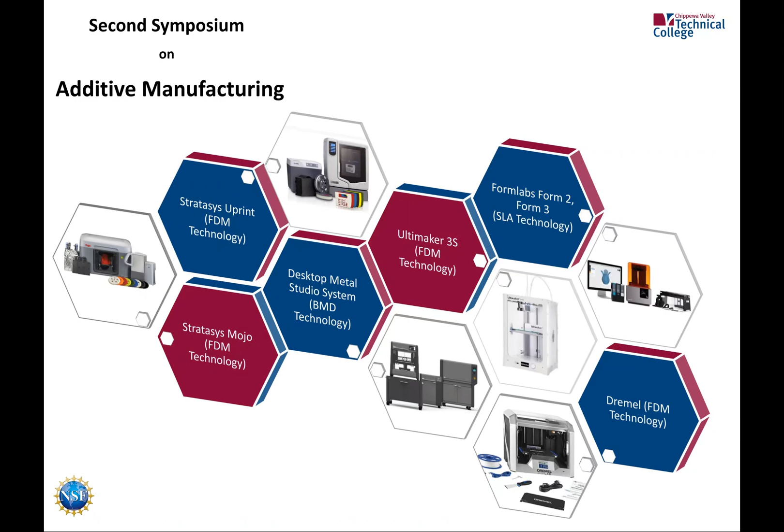Based on your response to our question, we chose Zoom as a digital platform to host this event. We are in the middle of the digital transformation era, and coronavirus somehow accelerated this digital transformation process. Our world has undergone a radical digital transformation, and in this symposium, we believe there are ways to make it smooth and fun.

We would like to use more graphic design and cloud computing techniques to provide you a more enjoyable digital experience. Our aim is to create more interactive and intuitive content. Activities like Kahoot with graphical context, a digital scavenger hunt in our website, and a virtual tour of Zeiss Metrology Laboratory are our first steps in this direction. I'm sure your creativity and reflecting those creative ideas in our surveys will help us to leverage innovative technologies and creative solutions across our online activities.

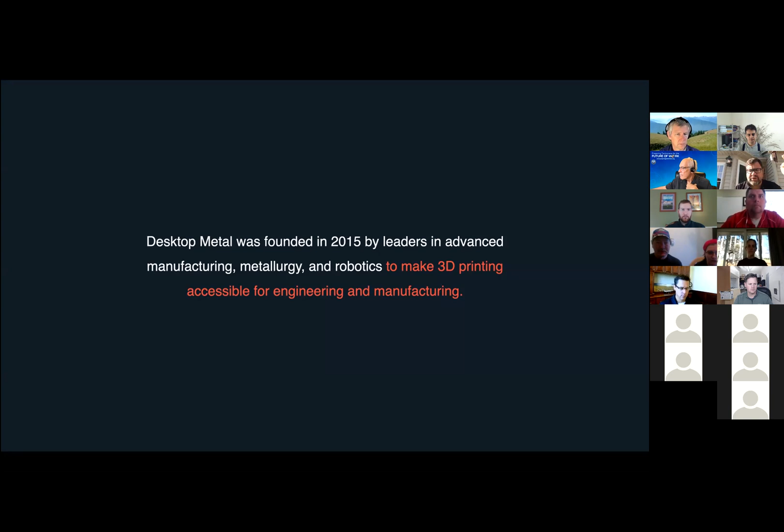And we believe we've actually done that with the advent of the Studio System, which we're going to spend a great deal of time talking about because that's our entry level metal system. Going into the first quarter of next year, we will be making a big splash with our new composite printer called the Fiber. And then on the manufacturing side, we have the Shop System as well as the Production System that are really geared to those folks, whether they're in automotive or large manufacturing where they're doing hundreds of thousands of parts a week. So these are for maintaining inventories in-house, having customer-ready parts, things of that nature. So like I said, we're going to spend some time going through the Studio.

So what are some of the challenges that we see in education for manufacturing? Low volume. Almost all parts produced are in low volume, resulting in higher than normal costs and longer lead times. And we see that from both an additive or a subtractive side, where the subtractive folks are not as interested in doing what we call the small batch or onesie twosies, and that's where we really fit the bill, so to speak. Complex geometries. So when you get into applications where you're using 5-axis mills, sometimes it's really hard to finalize or finish a part that may have cooling channels that a mill can't do. That's where we come in.

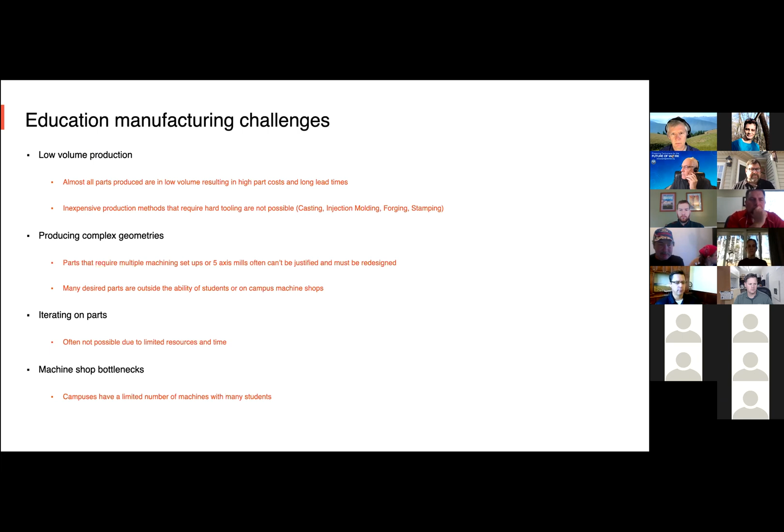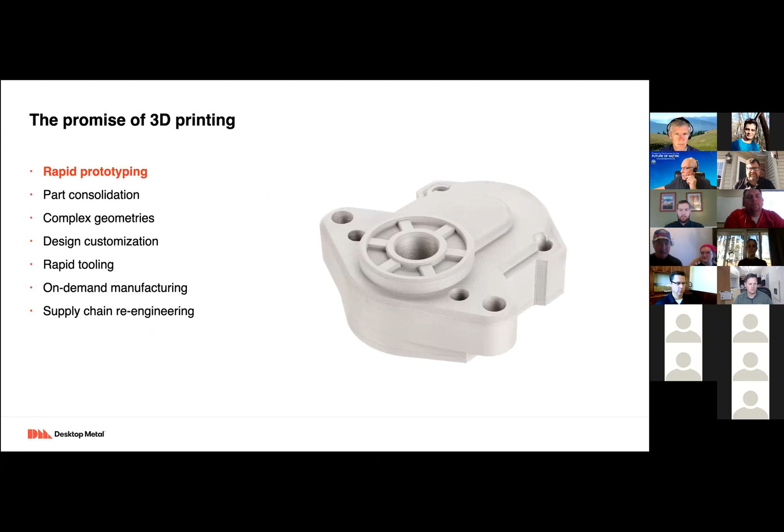Iterating parts, lead times, and machine shop bottlenecks. So these are areas where we see 3D printing really allowing us to help the end users with low volume production, producing complex geometries, and again, eliminating the bottlenecks of a system. When we also look at 3D printing, we look at it from 7 different areas: rapid prototyping, part consolidation, complex geometries, design customization, rapid tooling, on-demand manufacturing, and supply chain re-engineering.

But why should a university or a college or a high school teach additive manufacturing today? And it doesn't necessarily mean just specifically in metal, but even in plastic. Well, first and foremost, 3D printing is here to stay. It is a key technology of design and manufacturing. Some of the larger companies have embraced the additive world, which is beginning to trickle down into the smaller companies. It gives the students an opportunity to learn both from a CAD or SolidWorks and fabrication side, and allows the students to produce parts that really push the limits of manufacturing methods.

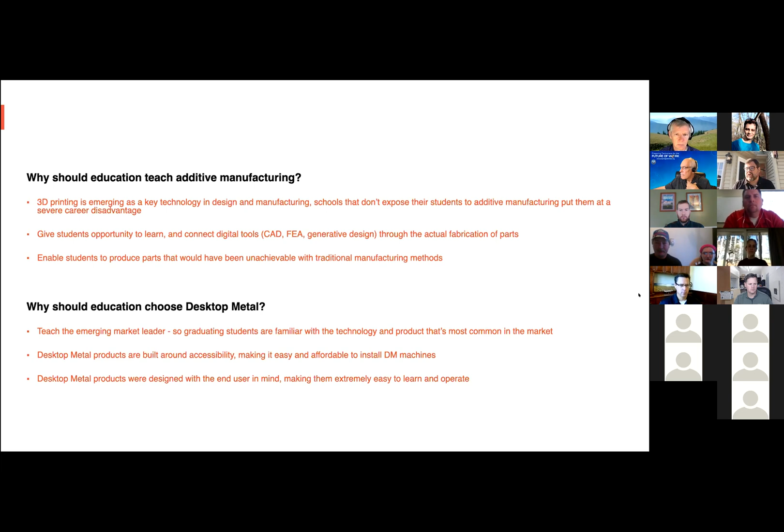You know, why should they look at Desktop Metal? Well, first and foremost, we believe that our system allows schools to invest in this type of technology. Secondly, we will be moving towards a curriculum and/or a certification, which would then allow the students to show future employers that they are able to do the job in both the plastic or the metal side. And it allows them to design and be creative in their current job functions.

Within the 5 years, we have now shipped well over, I want to say it's probably about 300 to 350 systems worldwide. Most of them are in the United States. We have a large presence in Europe, and we're beginning to find more of a presence in South America. But if you look at some of the folks that we deal with on the education side, there are some of the big name schools like Duke University, Texas A&M, some of the large engineering schools, and then we trickle down even to some of the high schools. Currently, we have, I want to say 2, maybe 3 high schools that have adopted this type of technology, which has really been an eye-opener for us, because it really shows that there is an interest even at that level in learning this type of technology.

On the commercial side, it is much broader. You get into folks that are in automotive. You get into folks that are in strictly manufacturing. You get into some of the scenarios where they're actually doing jewelry or what we call defense, like Lockheed Martin and people like that. So there are a lot of folks that are using this type of technology to better their overall environments.

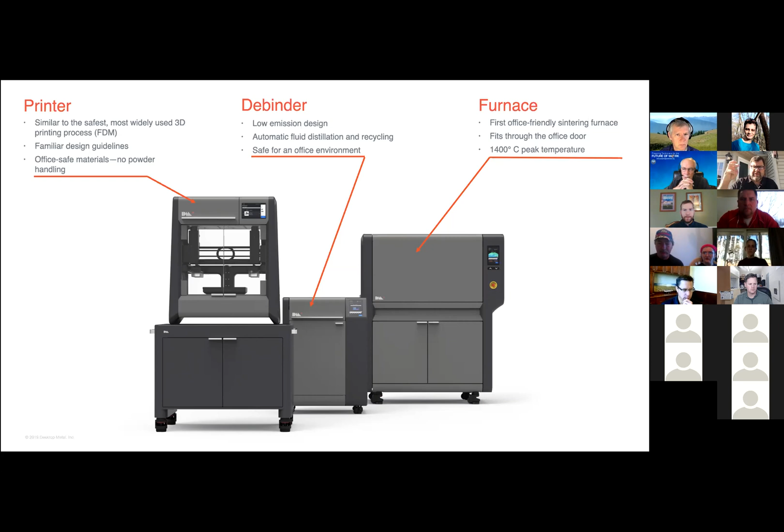But the build volume itself is a generous 12-inch on the X, 8-inch on the Y, 8-inch on the Z. So you're able to build very small parts to very complex parts to very large parts, which sometimes maybe the CNC or the subtractive just really can't do.

After this, this material acts the same as subtractive, so it can be tumbled, it can be media blasted, it can be welded. If you want to bring the Rockwell up, it could certainly be HIPed, or it can be thrown into an annealing oven to help bring the Rockwell up to make it structurally more sound. So again, instead of taking material away, we're adding, so it does act as the same material as well.

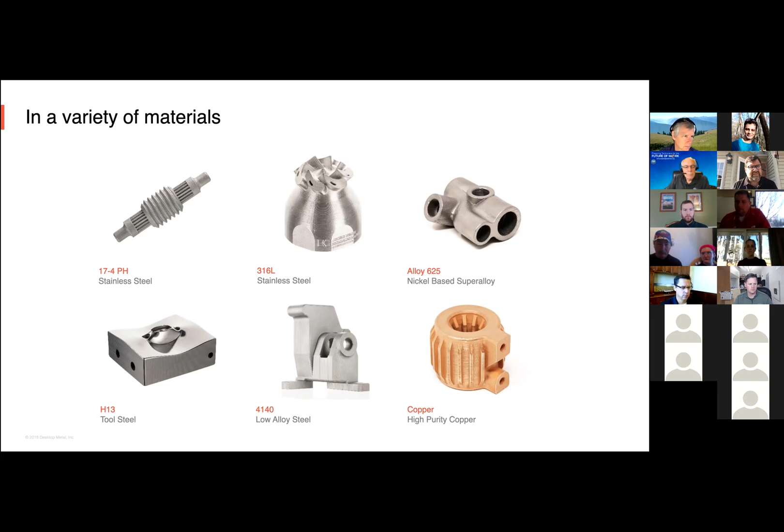Today, the materials that we offer for the Studio System are 17-4 and 316L stainless, H13 tool steel, and 4140 alloy. Copper is being introduced at the end of this month and being shipped out, and then Inconel 625 will be early sometime in 2021, whenever we can get through this pandemic and we can do some more testing. Beyond that, we have a long laundry list of other items, cobalt chromes, other stainless, other alloys that we will introduce as well that can be used within this system itself.

Some of the key features, when people ask us about why bring metal in, is because they've heard the stories of the lasers where you're dealing with hazardous powders, or you're dealing with the requirements of special facilities upgrades. With our system, there are no hazardous powders. If you see the canisters to the left-hand side here, all of those are the rods of material that the person does not come into contact with. But you can hold the rod in your hand because, again, it is bound metal encased in glorified wax.

There's no need for respirators because the debind system uses a non-caustic California Prop 65 compliant solution, in which the operator does not put their hands into the solution. It fills up after you hit start. There is no third-party equipment required. Everything is manufactured by Desktop Metal in Boston. And again, there are no real requirements needed for special facilities upgrades. So we've tried to make it as office friendly as we possibly can.

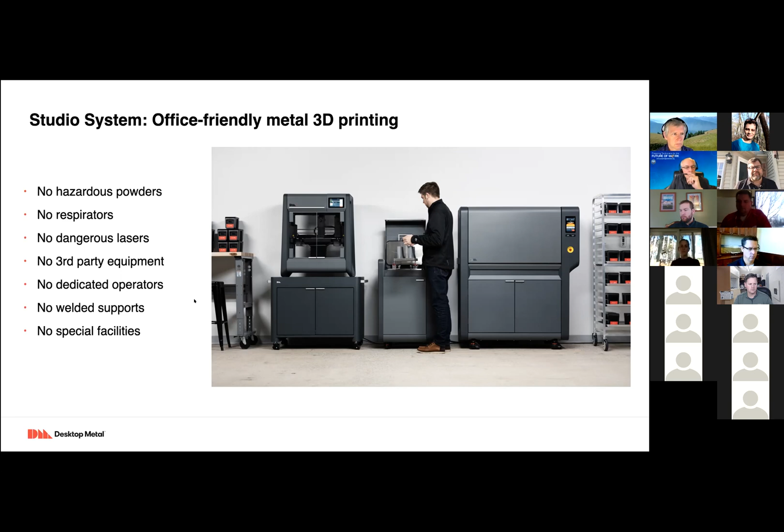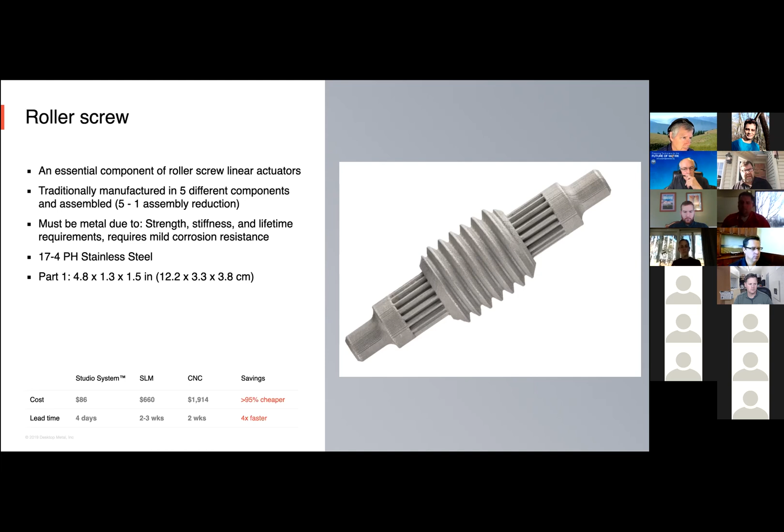When we look at some of the applications, this is where the rubber hits the road, where we're able to really show a differential in price and a differential in lead time in getting something done. This example of a roller screw is about 4.8 inches in length. So you can see that doing it with a laser system, such as SLM, is about $660 to produce that one part. If they do it via subtractive with a CNC, it's almost $2,000. But if you look at the material cost and the time to do it on our system, it's about $86.

So again, when you start looking at this, no, we're not going to be the answer for every application, but there are applications such as a roller screw where our system fits the bill. And you can see there, that's the application and where it goes into.

And it just shows some of the different designs that we're able to make iterations on. And we can also do the screws. And if you wanted to tweak them as well, you could certainly do that.

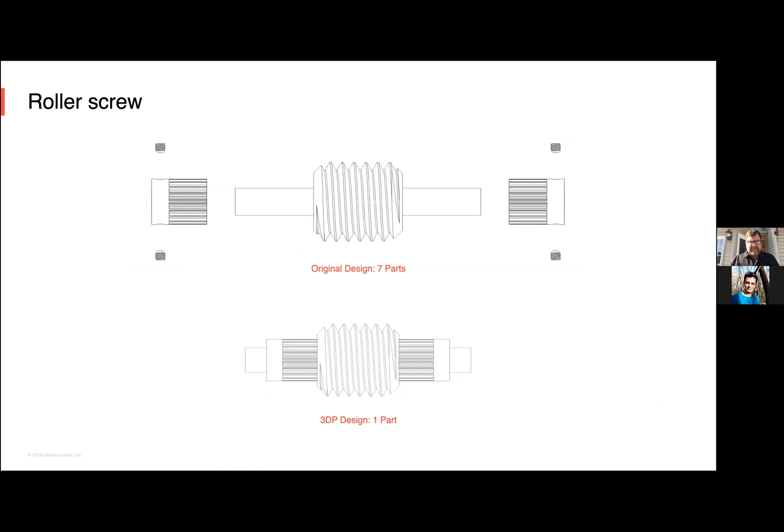The motor mount. The motor mount is a part that we use for a NEMA motor today. Again, this has been printed in stainless steel 17-4. And again, if you look at the overall costing, we're about 90% less expensive. I hate to use the word cheaper, but less expensive than CNC. And again, the time frame in which it takes to process the part versus the processing of the CNC world is certainly less, and able to get it out into the marketplace faster.

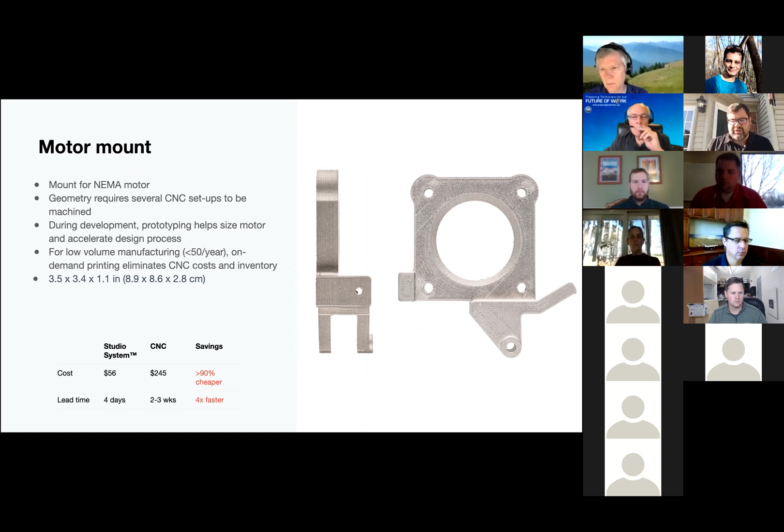And again, here's the bracket that goes on the NEMA motor itself. So people like Baldor or other motor manufacturers can utilize this type of technology, or folks that are using these type of motors that don't want to go back to the OEM but want to print them internally, they can do this as well.

One that's really kind of exciting for those students that have watched BattleBots, we actually produced this fighting robot saw arm for a BattleBot in 17-4. This was really kind of an interesting application that the team came to us with. We were able to print it, able to make it pretty by doing some post-processing to it, whether it was polishing or whether it was through doing a ceramic tumbling.

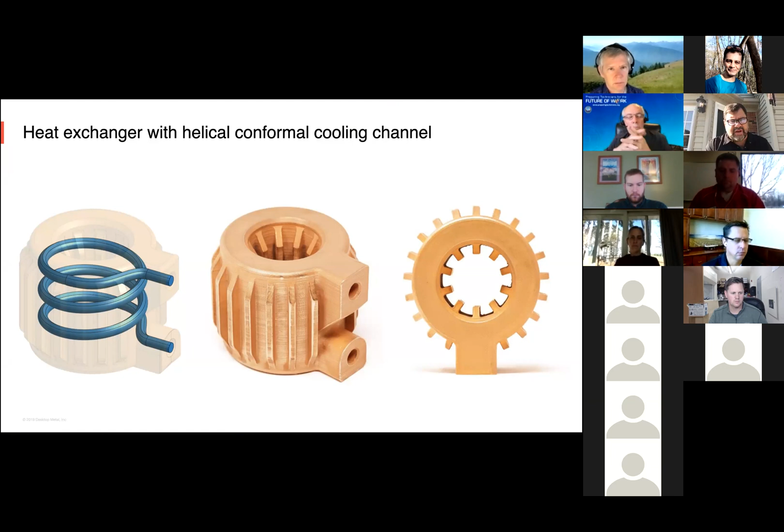So then you get into some applications where subtractive just has a very difficult time, and that's doing things with cooling channels. We're now printing in copper where we're able to do like a heat exchanger with a cooling channel. And the nice thing, again, is we go back to the ceramic that we use. The ceramic allows us to avoid making this a solid part. So after we go through the sintering, you can just blast it out with air, or tap it on the table and just let all of the ceramic that hasn't sintered just fall to the desk, if you will.

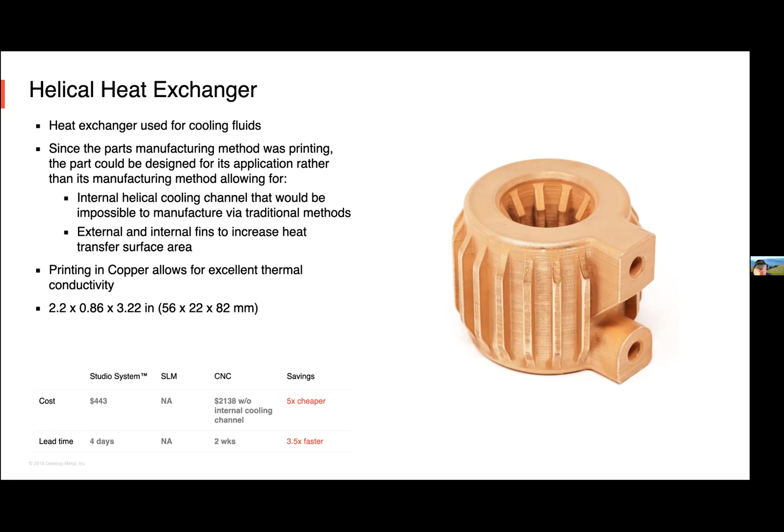So here's the part being printed. Here's the part after it's finished printing. We'll then go to the debind and go to sintering, and then the finished part here.

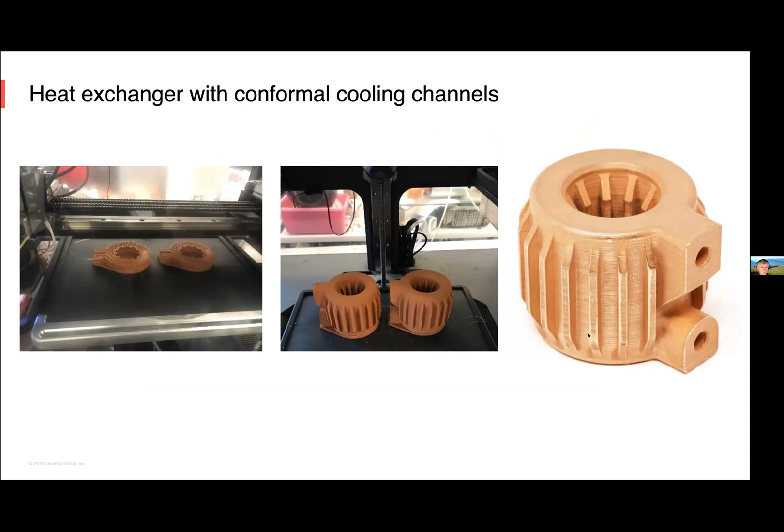Another example of material is H13, where we're using it for molding purposes, in which we're actually doing the channels as well for a mouthpiece. Again, we're talking about the traditional way, and I should go back and say that the numbers that you're seeing are economy costs from our friends at Xometry. So these aren't numbers that we're just pulling out of the air, but these are actual numbers from partnering with a company to say, what is the cost if you produce this?

So for us, producing a part in H13 and then having it polished or sending it to a finisher such as REM allows us to make a very pretty, functional part that again is about half the overall cost of traditional manufacturing.

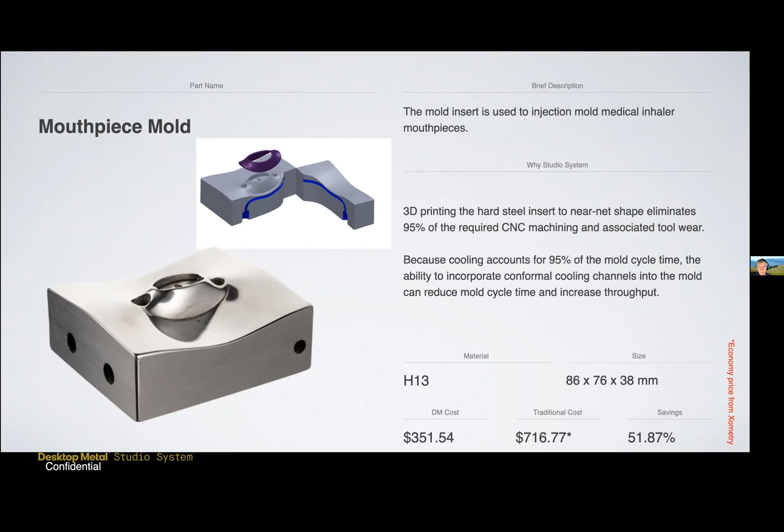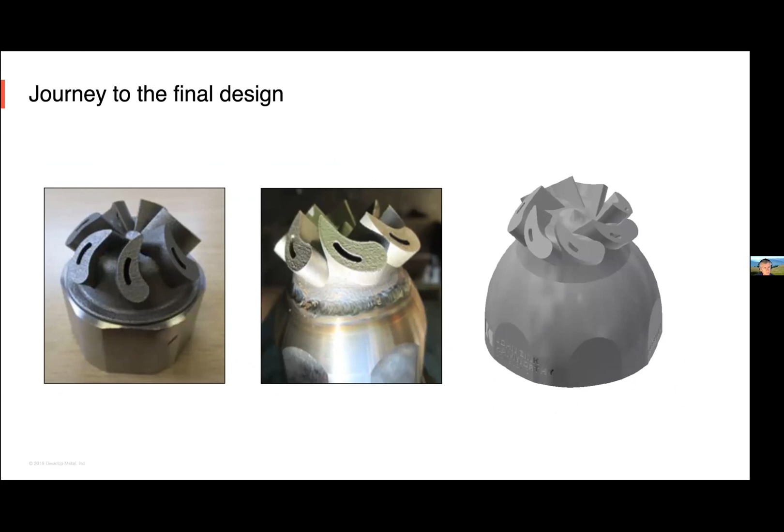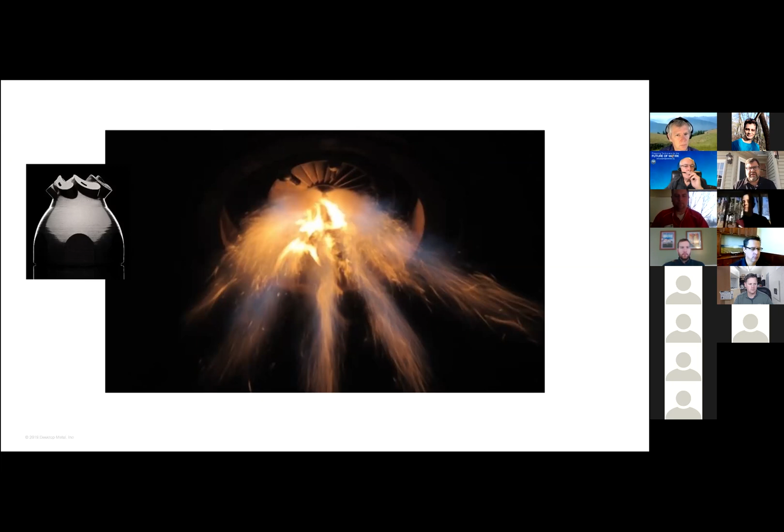And then we were able to print it in 316 where it had excellent mechanical properties, able to do the high temperature, corrosion resistance on down the line. And we were able to do this at about 1/4 of the overall cost of what the current process was. And then you could see it's just a picture of it in operation. So that's an overview of the atomizer itself. It has reduced the consumption of gas, if you will, and has been able to spread out accordingly. So they've been very pleased with this. And again, this is just another example of the Studio printer in operation today.

And then one other application I think is really kind of cool is with the advent of our high resolution print head, we're able to print parts that are about the size of our finger. So this is an example of an end effector about the size of a quarter that we're printing today. So we're finding that there are very few limitations, with the exception of size, that we're able to introduce this type of technology in today.

And of course, we all had to deal with the pandemic. We're certainly still dealing with the pandemic. But what Desktop Metal did is we teamed with hospitals, and we also developed ventilators for hospitals throughout the United States, where we were able to help get low-cost ventilation for those early on in the pandemic with COVID, and get those out there. And we were able to do this and keep our systems running, keep customer systems running. And this is an example of one of the mouthpieces or one of the components that goes towards the ventilation itself.

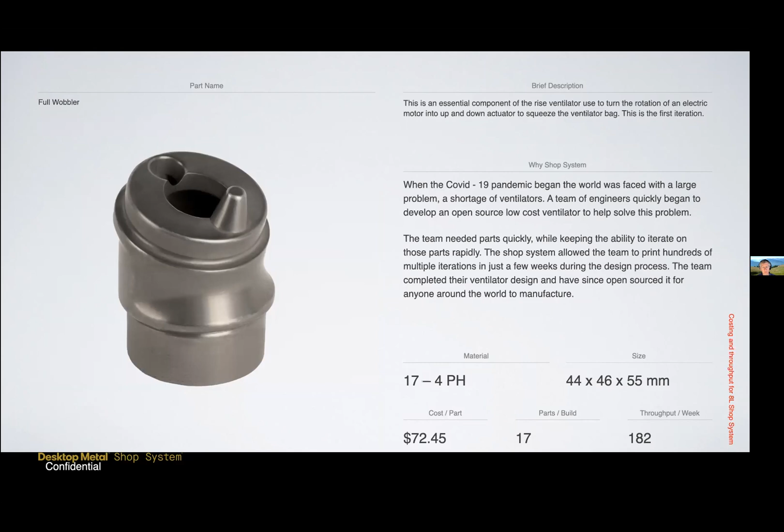I want to make sure that I kept us on time. Mahmoud, I hope I did. I feel like I've presented an hour's worth of stuff in about 20 minutes.

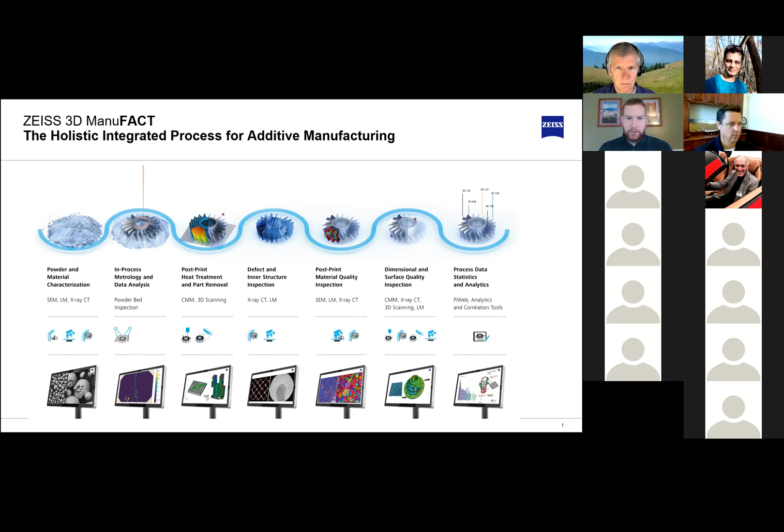So since we only have a little bit of time, I'm going to jump straight to the tour of the lab. So when Zeiss came up with this idea for additive manufacturing, we were looking for a space to test all of this out. And we've got some really good relationships with the people at Oak Ridge National Laboratory. So in 2018, we signed a $25 million CRADA with them. CRADA is a cooperative research and development agreement.

It's a plan for us to work with Oak Ridge for 5 years to develop tools to solve quality issues in additive manufacturing. So Oak Ridge has this manufacturing demonstration facility that's located on a satellite campus in Knoxville, Tennessee, just across the river from the main campus of Oak Ridge. And this building here is a 100,000 square foot facility where they invite industry partners to come, bring equipment, and do research with the members of Oak Ridge National Lab.

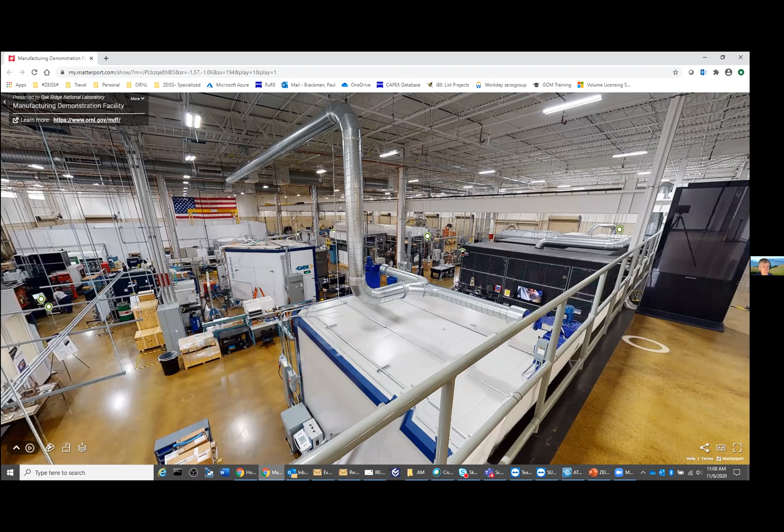So as you can see, there's a few different spaces in this lab. Zeiss has its own little corner. And if we turn around, these are office spaces and conference areas where people can come and learn and discuss research topics. So I'm going to jump straight down to the lab. And you'll see we have the same blue line here. And the idea for the lab is to be a connected lab for all of these systems to work together.

So like we have in the poster, when we start looking at powder characterization, we have a suite of light microscopes over at the window here where we can do transmission light to look at the surface characteristics of the powder. We can look at particle size distribution and check that during multiple reuses. We're not always looking at virgin powder. We're often looking at powder that's been reused 1 or 2 or 3 times, and how that powder size changes with the reuse, and how we can track that back to defects in the printing process.

Additionally, we have a scanning electron microscope here, and this is an older picture because we actually have 2 scanning electron microscopes here, so 3 in total, that we can also look at powder at significantly higher resolution, and actually look at some of the surface characteristics of that powder as well. So the Evo over here is kind of our workhorse.

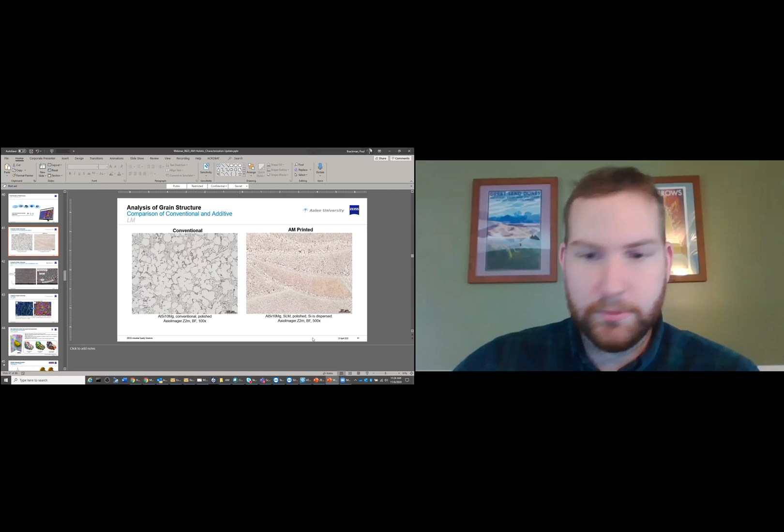So this is a light microscope etched image of aluminum, AlSi10Mg, aluminum silicon magnesium. This is a conventional sample at 100 times, and you can see the grains very, very clearly here. In additive, this is at 100 times and they're still really small. And you see these melt pool boundaries, very well defined, separating these grain boundaries here too.

And it's been a challenge for us to get good images of these kinds of things. Specifically when we're trying to do large area EBSD, when the grains are so tiny, you really have to be tight with your brightness and contrast and your signal to do a mosaic across these sections, or else you'll lose the entire image.

And so one of the things that we did with the blade project actually was, I don't think I have an image of it either. The blade has a couple different components to it. There's a fir tree at the bottom, then there's the airfoil, and then there's a shroud at the top.

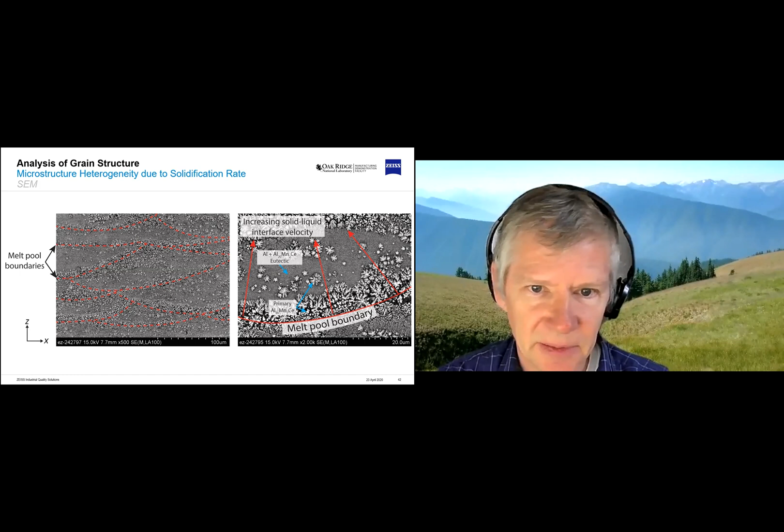And the printing is on the Oak Ridge side. But from what I understand, you change the processing parameters in the areas that you're printing to get the solidification rates that you want, and then that's what determines the grain structure that you get out of the final part. It looks pretty dendritic at the interfaces here. Yeah, I think this is aluminum cerium, kind of a boutique alloy.

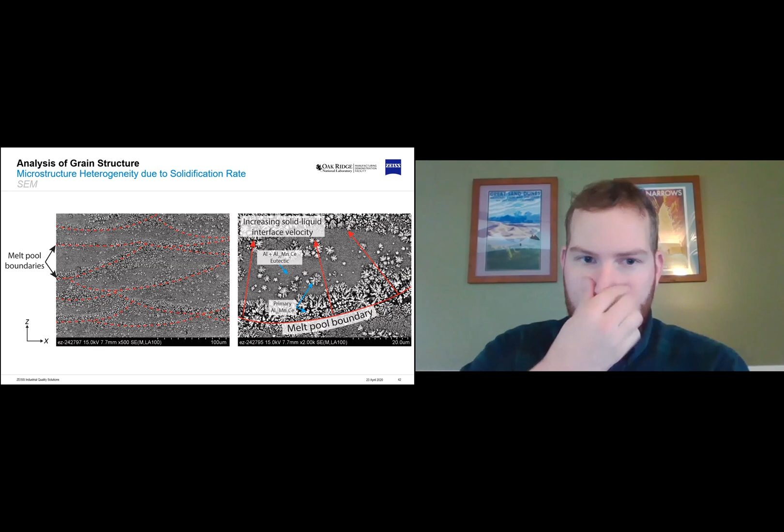Would that have anything to do with the triangulation of the 3D file that was used? Because it looks like in the image to the left, there's a lot of triangular type geometry. So I think this would be like a cross section of the interior. So I don't think so, because the triangulation would just be on the exterior. I think this is related to the scanning strategy of the laser.

So I know they've done a lot of work on these solidification rates and seeing what happens if you just raster back and forth, what happens if you try to do some kind of spiral, what happens if you do totally random spot points. I'm not exactly sure which method this one was. But yeah.

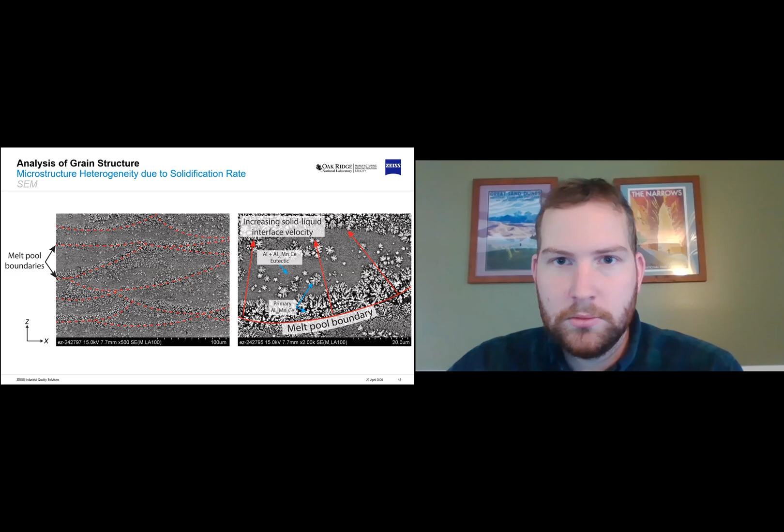Are there other questions? Can you talk about CT scanning of 3D printed parts and how are you implementing that into the build parameters? Yeah, let me see if I have a slide on that. So one of the pillars of our collaborative with Oak Ridge is rapid recipe development for 3D printed parts. I don't have a slide on it.

And what we're doing is we're working with them to speed up the printing process for new recipes. And what I mean by that is they'll print 50 parts on one build plate, every single one of them with a different set of processing parameters. So either different energy density or laser power, speed, spot size, bunch of different stuff.

And we're working with them to develop a way to rapidly qualify each one of those and quantify the defect structure of those parts to give a feedback saying, these are the best processing parameters for this part, for this geometry, for this machine. And then be able to take that into, okay, what happens if we bump it up a little bit or bump it down a little bit? Then we can iterate this process to get the absolute best parameters.

And then we can also use that to check and see, is there an influence of the machine itself, with the gas flow or the rake direction? If you print the same exact part 50 places on the build plate, do you get the same exact defect structure in the same exact places every time? Or is there some systematic or stochastic expression of the defects? So again, that's mostly using the Metrotom.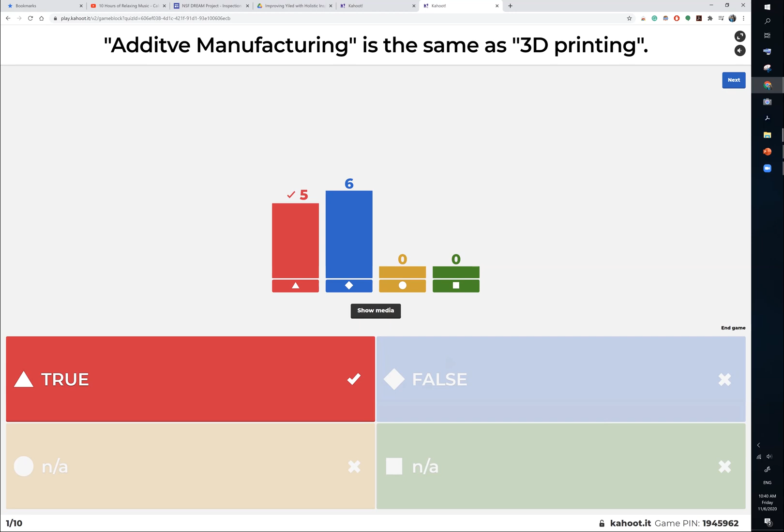Very good. So I believe your discussion, your answers are more important than our multiple choice answers here. There is uncertainty around these topics. So we appreciate your input. Very good. So Hans, ready for the next question? Hans, I would appreciate, since you joined this event, if you just click on one of the answers, so then Kahoot automatically will go to the next one. Oh, I see. Okay, I'll try to do that. Okay, I appreciate. Nice.

Hans, do we have sound on your end? Yes. Okay, is it at a good level? Well, not bad. Okay.

Okay. Yeah, we have 5 correct answers here. So I would like to show this infographic here. We are interested in Deloitte resources. Deloitte Insights has very nice infographics, articles and videos about 3D printing and the trends in this industry. So as you see here, we have 3,882 AM-related patents issued in this time frame.

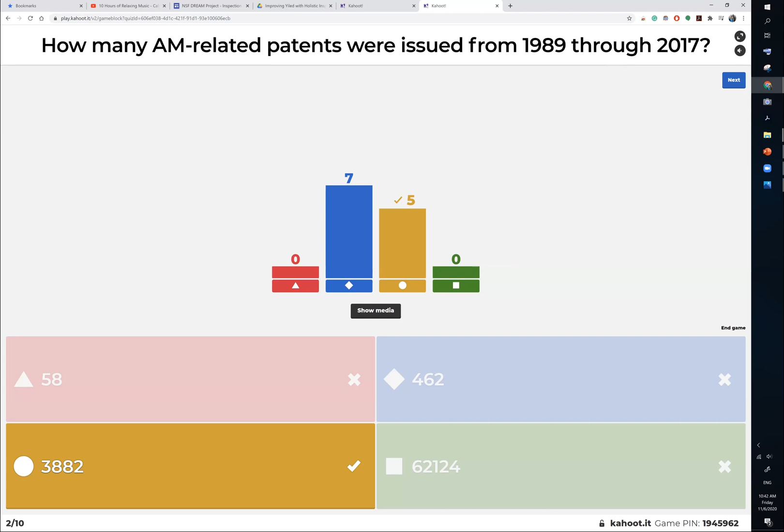Oh, I dropped off the board. Dang it. Too slow.

Paul is coming from industry and he's aware of these trends. That's good. And same thing for Steve. He's from industry. I just looked at the last answer and I said it looked a little high.

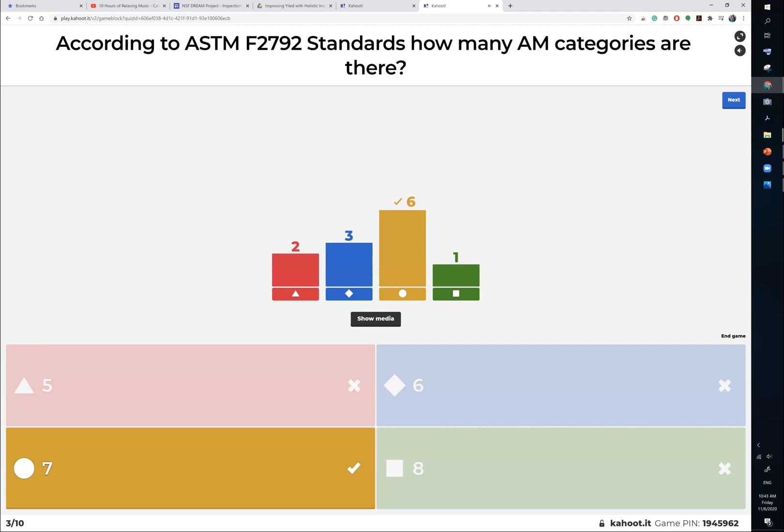Yes, 7 families of additive manufacturing. Again, I would like to bring up this document here. The ASTM F2792 standard shows there are 7 families, and ASTM is very proactive in developing AM standards.

Our image may help you find a good answer. Each time I look at this infographic, I learn new things. Yes, companies. Industry is number one in this field.

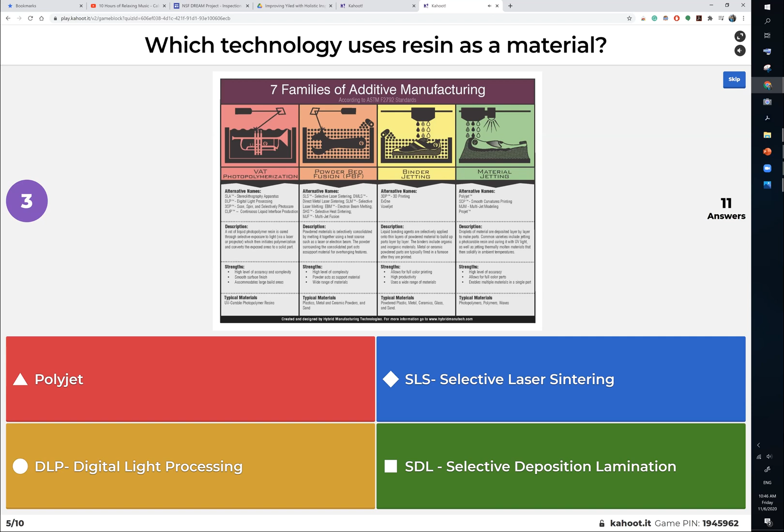Okay, digital light processing is the correct answer. Let me show it in the document here. So there are different terms and acronyms for different technologies here. This document shows alternative names like this,

that photopolymerization is a technology, and there are different names like stereolithography, and another name for this, digital light processing, DLP. The reason we designed this question was to get familiar with the different terms that different people and companies use.

And for the last one, I forgot to show information about which sector is dominant in this field. As you see, companies, with this color, in the 80s, 90s, and in this century, are successful in pushing this technology forward and having more patents in this field. Okay. I think PolyJet uses resin too.

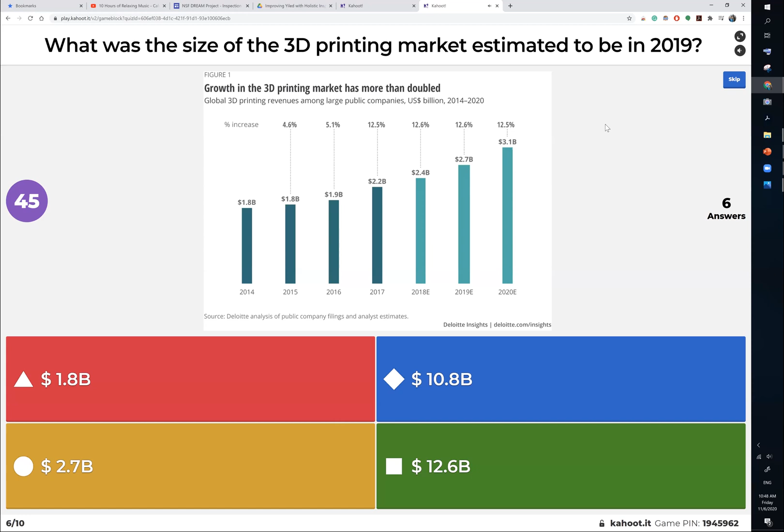Another document from Deloitte. Yes, 2.7, and we saw that here. In 2019, this is the estimated one, and we know that coronavirus affected these numbers a little bit, especially 2020, the estimated one.

I'd almost argue it probably helped it, with everybody sitting at home bored and wanting something to do. They probably all went out and bought a little 3D printer. Absolutely, yeah, I agree with you. That's what I did. I had one, but I did a lot of 3D printing during the quarantine.

Yeah, but everybody gave all the face shields they made away, so they didn't make any profit. Mm-hmm. Just wait till your taxes come around. If you're smart, you'll deduct it. Nice call. Yeah.

Our presenter after the break is Mr. Rick Hoyer. He has used a 3D printer, and I think his success story would be a good one. So hopefully soon he will contribute to this number. He brought this infographic from Formlabs.

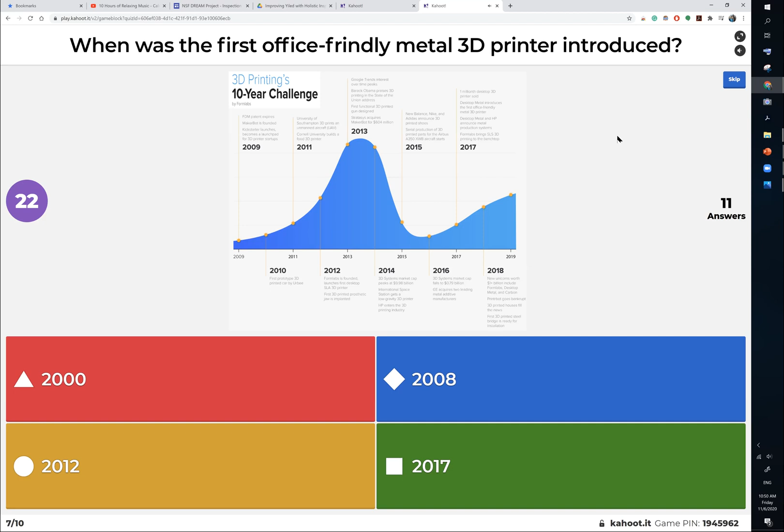So yes, 2017, I think I can show this here. Sorry, maybe the text was small, but here you see it says Desktop Metal introduces the first office-friendly metal 3D printer. And this is the website, the resource that we use. These are OER resources, open source resources. You can type this title in Google and find this document for your references.

So high school teachers may like to use this in their lessons and materials. Industry members may like to refresh their AM knowledge. So we try to have references for our images here. Brian from industry.

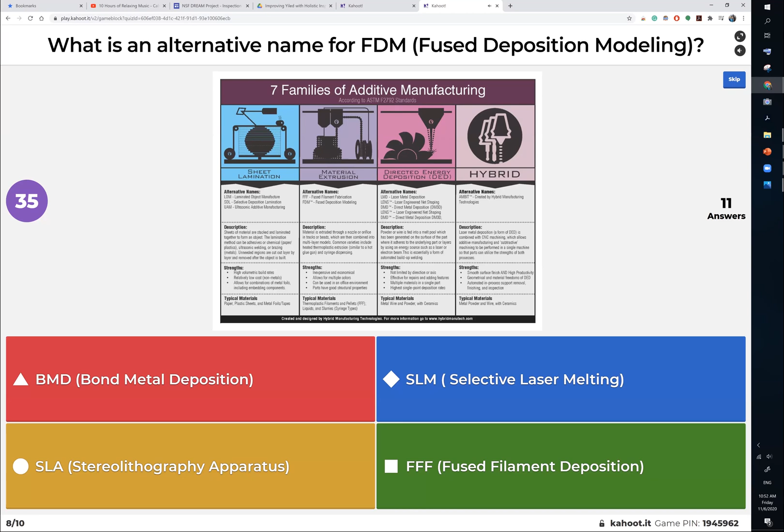Hans, do you think it's a good idea to skip this one or wait another 30 seconds? Okay, yes. So, fused filament deposition is another name for fused deposition modeling. We know these are just terms, but sometimes they are important, especially when you are at an event or a seminar, reading an article, and would like to distinguish these technologies. So frequently we see FDM and FFF in articles.

I do way better when I just guess instead of think about it. Yeah, common sense, I think, is very important. It is my number one source, and then more scientific articles.

It should be fused filament fabrication, I think, is what they use. Okay. Yes. We needed to fix that. Yes. You're right. Maybe two terms for one technology.

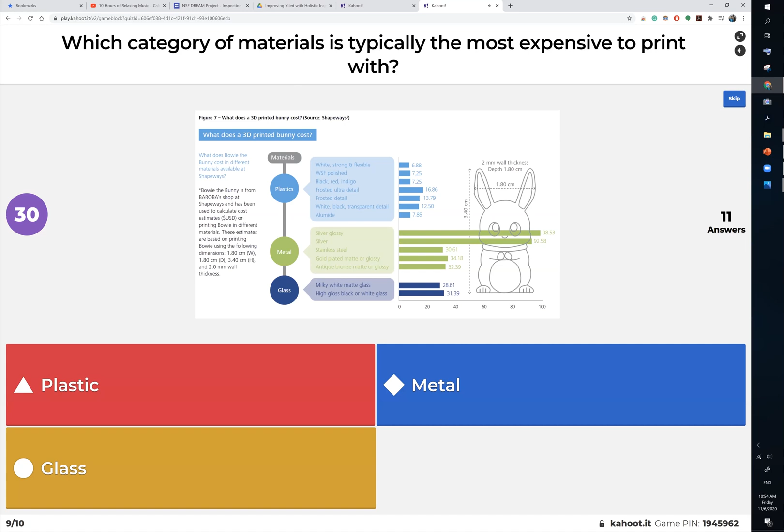So just a little bit of humor for you. When I was working for McNeilus Truck and Manufacturing in Dodge Center, Minnesota, where they build cement trucks and cement mixers, I really struggled to understand what people talked about there, because there was a subset of people from the 70s, a subset from the 80s, and a subset from the 90s. And they all had different names for different things on trucks. And they would all say their own name, and everybody understood what they said, except for me. I heard 4 people say 3 different things, and they all meant the same. Talk about the stress as a new engineer.

Absolutely, yes. Terms are very important, and based on this survey and feedback from you, we can reshape this activity, have more technical slogans, or focus more on operation and process. We are open to adjust.

And here, the correct answer, as you see, is metal. On average, metal is more expensive. Of course, there are some materials here, like glass, that could be more expensive than stainless steel, but on average, metal is the most expensive one, and plastics are more affordable. Okay. Our last question.

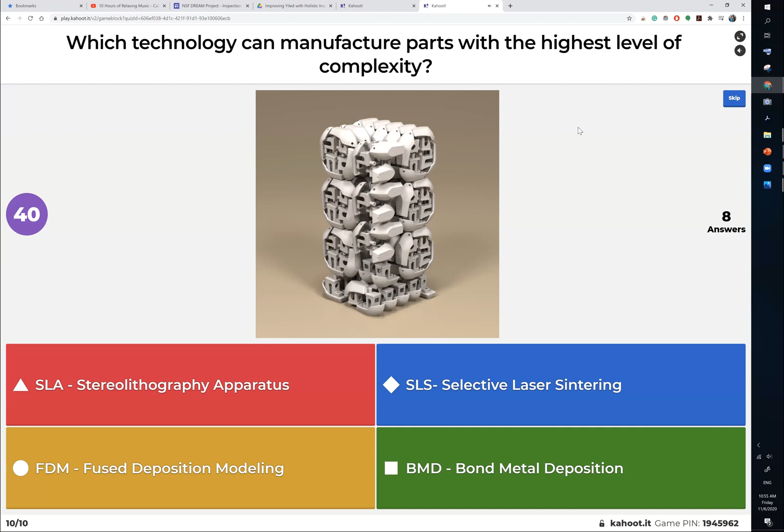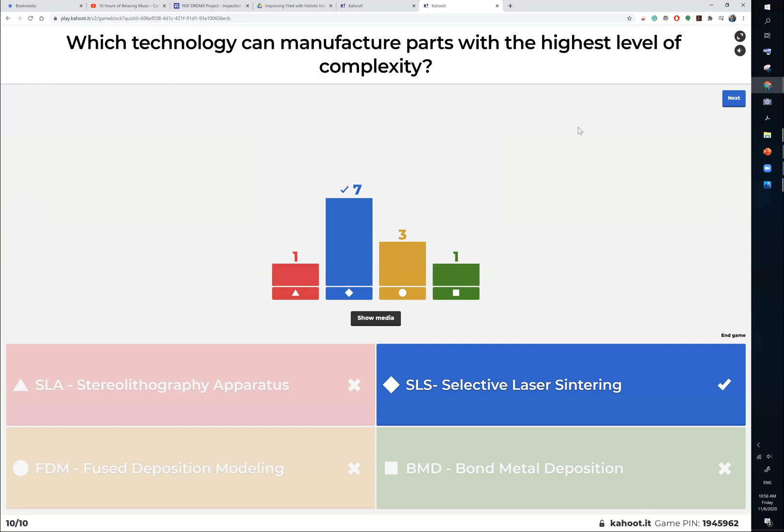Yes, selective laser sintering. We believe it has the capability to handle the most complicated geometries. And one of the resources that we use to address this is here, selective laser sintering. Here you see the high level of complexity, the strengths of this technology. And we know that FDM has its own advantages. BMD as well. SLA is very good in manufacturing complicated parts, and we see it here as well, high level of accuracy and complexity. So the answers are not 100% sure. There could be a discussion around those answers.

So I think now we can see the winner. Winners actually. So Brian. Second place. What has he won? Yes, an all-exclusive paid vacation to his kitchen. Oh, yay! Do I have to stay there for a week? I'll sleep in my guest room. That'll be a vacation. It's all inclusive. 2 weeks in quarantine. Whatever's inside my fridge.

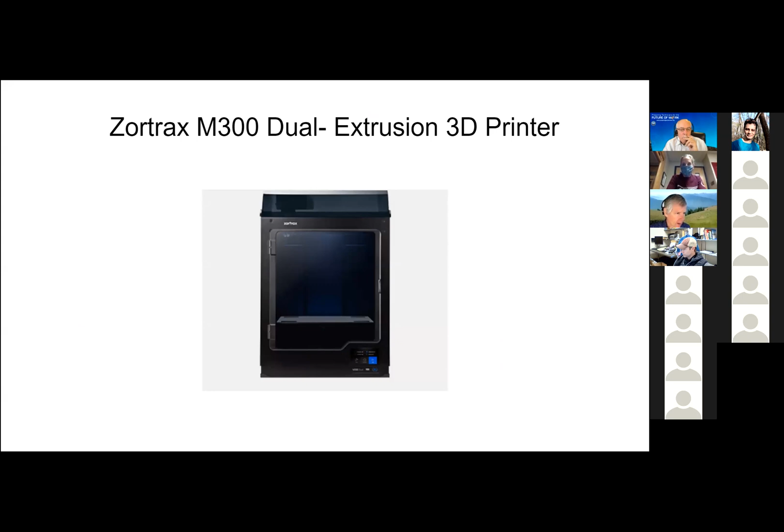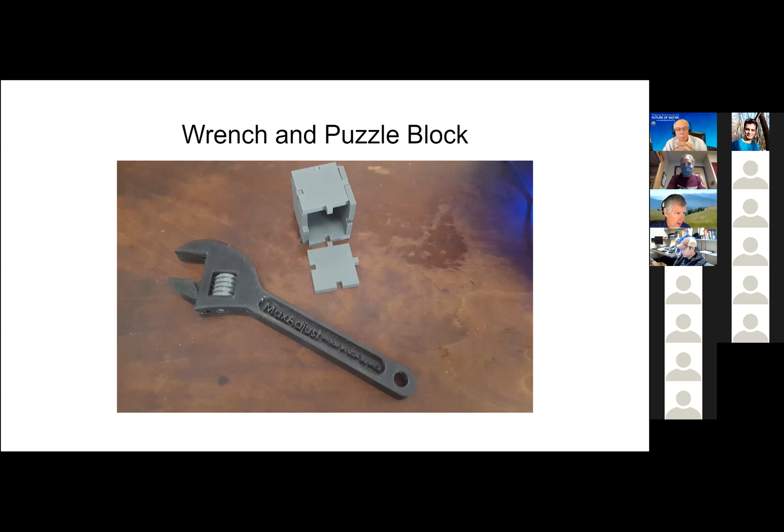We've had our 3D printer for a few months now, and I've been exploring with it ever since. Our first experiment was to determine its accuracy, and I printed the puzzle block and then the wrench. Mahmoud was kind enough to forward me a study done by Formlabs to determine gap sizes between components. These were just guidelines, and each printer is slightly different, so a little trial and error is in order.

We definitely really enjoyed the jokes that were going around about buying 3D printers during the pandemic, because that's definitely what we did, and that's what we've been working on mostly throughout the last few months. I actually got nearly 900 hours clocked on it, and we didn't have it up and going until just about August. So it runs pretty much.

All right, next, we started exploring with different materials. The third part in previous slides was printed at 10% infill with a product from Zortrax called Z-Ultrat, a material that is very hard. It is so hard that I was unable to crush it in a vise.

Then we tried the flexible material from Zortrax and printed air cushion insoles. It took 5 prints to get them so that they were comfortable. I was also able to find an app that you can scan your foot using your cell phone. It can give you all the measurements for shoe designing.

We then tried multicolored printing. Our first attempts were unsuccessful because the different colors that we had available were of unlike materials and they wouldn't adhere to each other. While it turned out pretty cool, it was very labor intensive. We tried to allow 2 to 3 layers for each color and then calculate the time required to perform the task, pause the print, then change the color and restart the print.

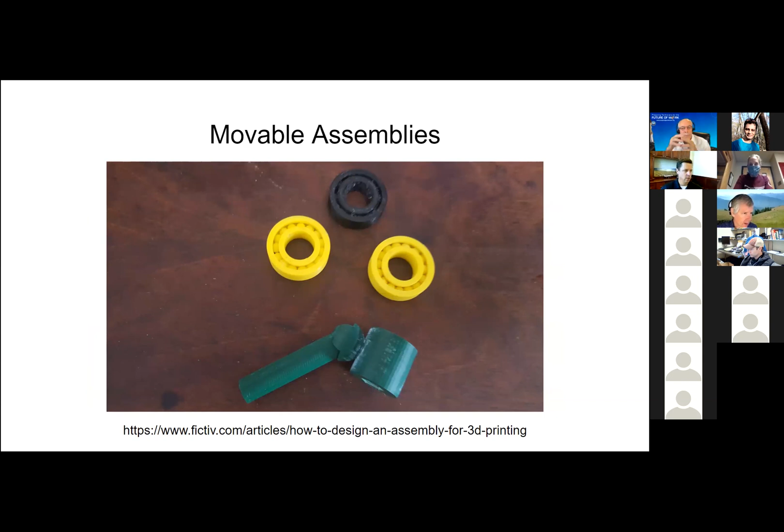When it came to large prints like the gearboxes and gears, we set the slicer to the thickest layer height, which is 0.30 millimeters. I have learned it shortens the print time considerably, with practically the same results. The gears are quite accurate and work quite well for being plastic. And the ones you see in that linear actuator, I've had up to 2,000 RPM, which is pretty fast, without wrecking the gears.

I found it necessary to create little half-hour test prints for fitment, and nothing's more disappointing than realizing on your 25-hour gearbox print that the bearings were either too loose or too tight.

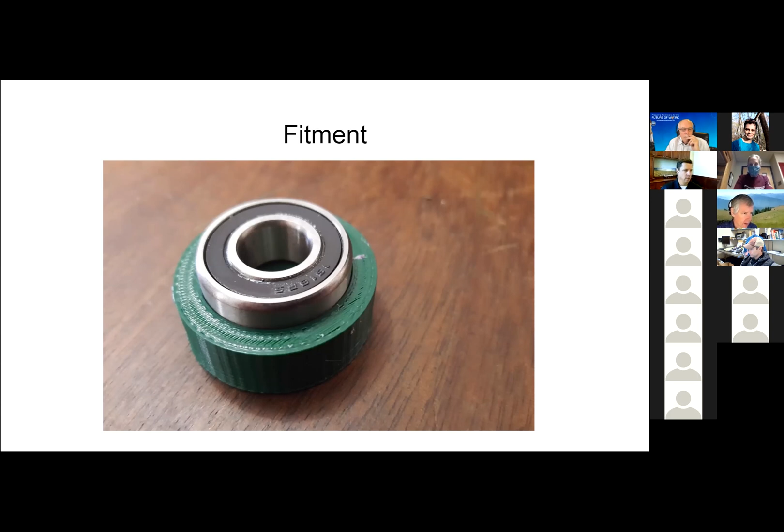Some of the current challenges we have in additive manufacturing are reverse engineering and 3D scanning. We are also experiencing difficulty with prints being warm enough now that the weather has gotten colder, even though we have a fully enclosed printer. We're also playing around with photogrammetry for reverse engineering, because a 3D scanner isn't exactly within our budget. We have had mixed thoughts with this, as masking the 50-odd photos is pretty time consuming, with results that were not always consistent.

Does anyone have any questions for us? Very good presentation. Thank you, Rick.

I think in our Fab Lab, we have a very advanced 3D scanner. Zeiss manufactured it. So if you have any questions, Paul from Zeiss is here. He may help you. Our Fab Lab is open. You can use it. We have so many resources. Joe Weierzall is our hero in reverse engineering. He can support you. And we are here to help our local industries, especially startups like you, to go forward. Yeah. And we might have to take you up on that too.

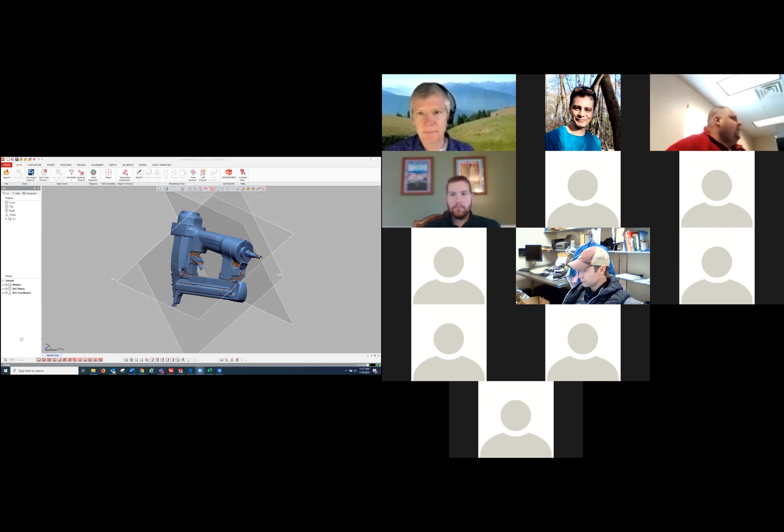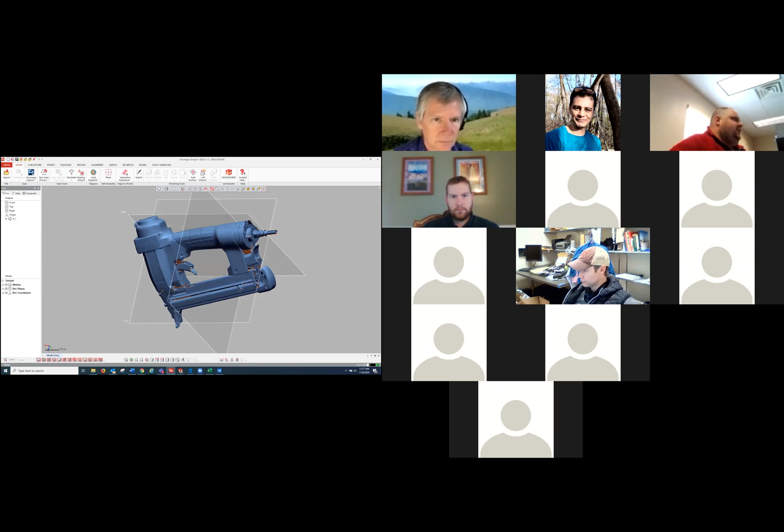Looks good. Okay. So we took this tool, and in the proprietary software that we received from Zeiss for scanning our point cloud, this was our end result. Looks pretty cool, right? If you zoom in here, you can see how detailed the scanner is. You can read the oil label here on the back. If you zoom in, you can read the warning label, right?

It's a pretty powerful tool, but when you look at it, you're like, holy cow, there's a lot of holes in this point cloud, right? So we purchased another software from SolidWorks, or 3D Systems, whatever the parent company is called.

My brain, Geomagic Design X. So we purchased this reverse engineering software to go through and create 3D models. So as you all know, scanning can take some time, but once you figure it out, I was able to scan this point cloud here in the course of about 3 hours. And that was probably 15 minutes of me setting up the rotary table and letting the thing go and take picture after picture after picture and then rotating it.

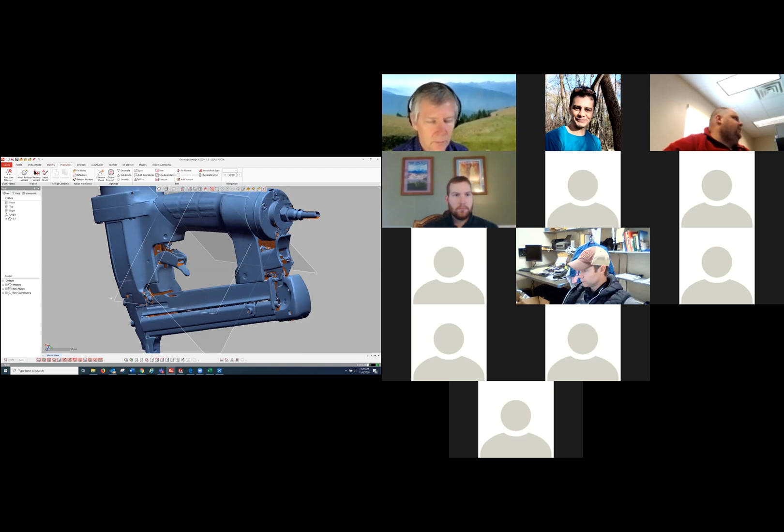So once you go through this process of cleaning and filling holes and cleaning up this picture, I'll just do a quick little synopsis. You can come through and pick these surfaces and fill these holes. Takes you maybe a couple hours, and you can smooth your polygons, and the software allows you to output a model right into SolidWorks. So I'll open up SolidWorks and I'll show you the surface model.

Can you guys see the surface model pop up? No? I'll share again. Yeah, I could see it. Oh, sorry. We had it for a minute, but it's gone. It's coming back, hopefully. Yeah, we can see it.

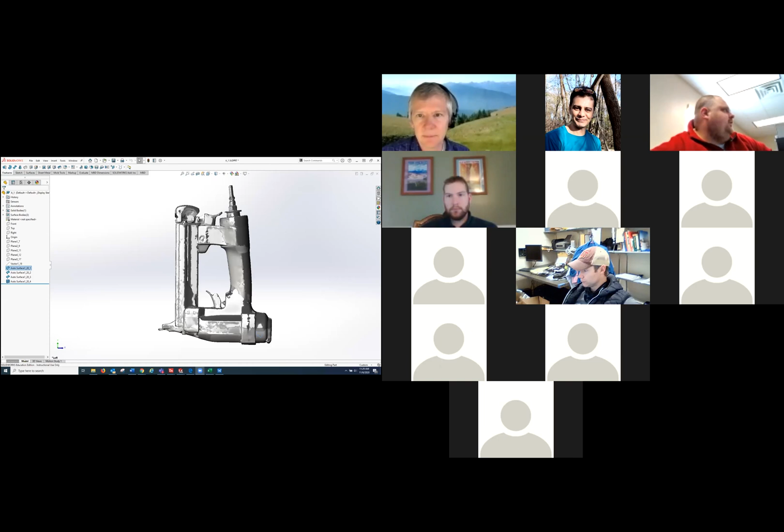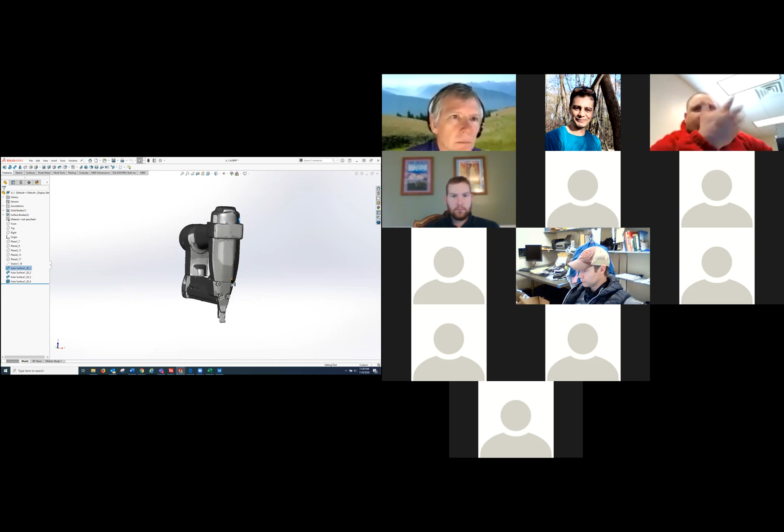I mean, it's really rough, but once I cleaned up that point cloud, which took about 2 to 3 hours, I was able to output this rough surface, right? I don't know how much information or detail they need, so I'm not going to spend days on this. But I was able to output this 3D model surface and made it up accordingly to the coordinate system and create a physical model that they can use within their design department to validate and understand design for manufacturability.

So I made a little video here. Let me know if you guys can see the video here. So that the designer can use physical data to create working design models before you go to build something, right? I know in my previous life, when you're building a $500,000 chiller and things don't go together, people get kind of mad, right? Leaders and VPs and people get upset. Well, with these tools, we can do some pretty amazing things.

Now, we're talking about additive manufacturing, right? They're really not going to 3D print this part, right? Because they have a physical part. But now let's talk about how we can take that scanner and go to a 3D part, right? So there's a local company, and I talked last time about 3D printing parts for classic cars and stuff like that. So I wanted to show you the steps in the scanning process, going from a scanned part, which looked like this. So this was the original part.

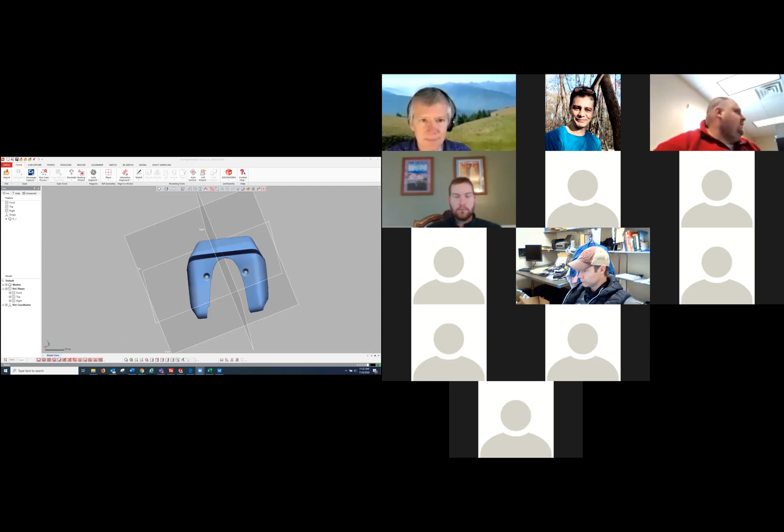Oh, I'm not sharing my screen. Somebody's got to stop me. No one stopped me. I can see it now.

Okay, so this is the original part, right? So this is our scan data, our point cloud, right? Very detailed. If I turn this over, I can see the part number from Ford Motor Company from 1960, right? Very detailed, very good at inspection. And then I could take this straight to a 3D printer and reprint it once I create my STL file. But let's say I want to make some changes on it. Well, that's where this software comes in.

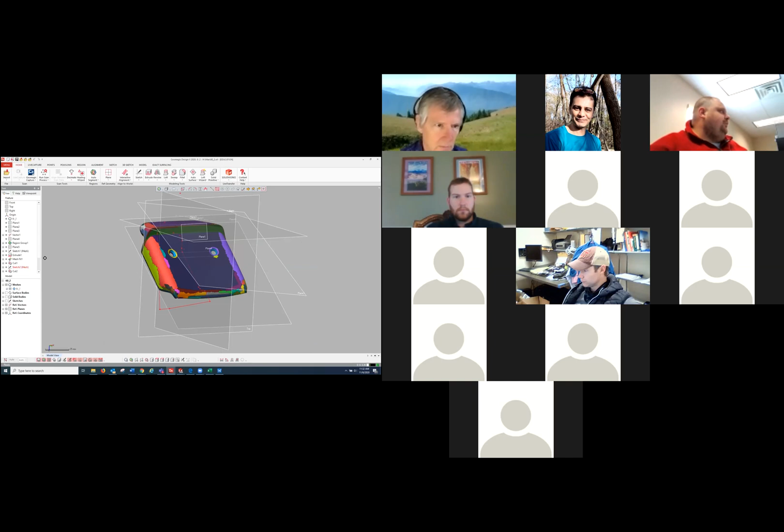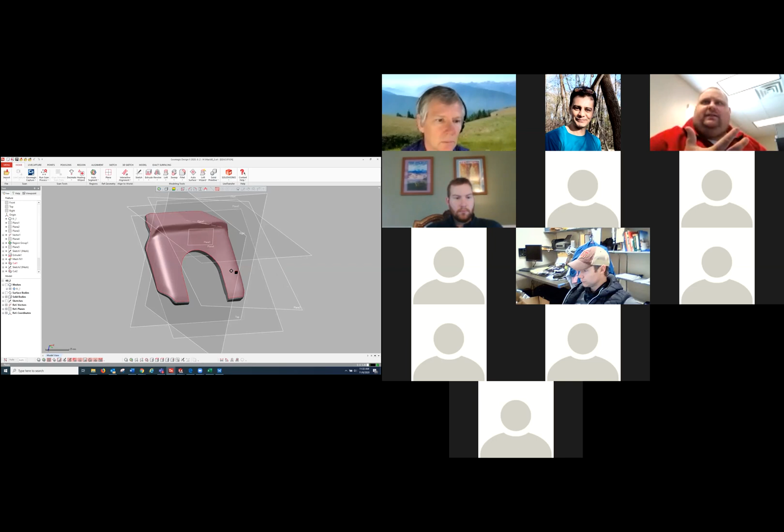And over probably a couple hours, I was able to smooth this out, fill the center hole, create some surfaces and some extruded parts, and I could create the feature shape of that part. If you look over here on your design tree, there's 1, 2, 3, 4, 5 things that are just like SolidWorks. And if you're much into designing, 5 features in the design tree is pretty simple and pretty fast to create. And the software is so powerful that it'll automatically create sketches for you, which is wild that you can do this with some softwares.

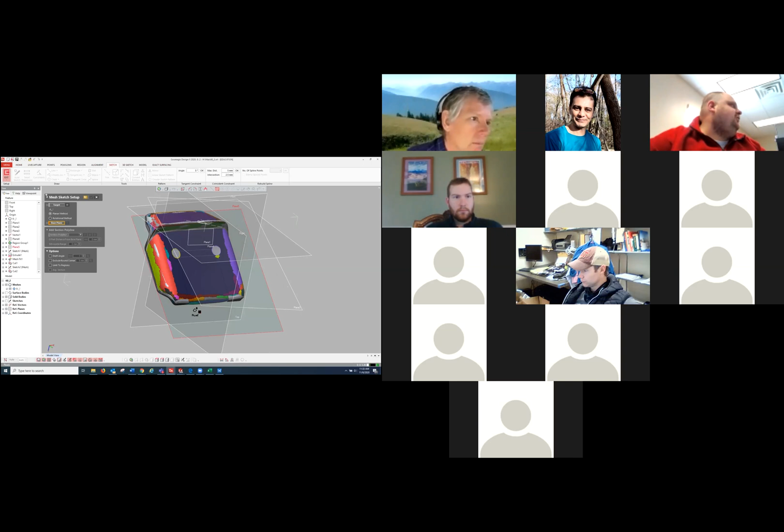Just go out here to this mesh sketch, pick your plane, and drag your plane through the part. You see that blue line right there? That blue line turns into a sketch that you can automatically use to model, to extrude. So if you want to take something, modify it, and go right to a 3D printed part, in less than a day, you can take something from 1960, scan it, reverse engineer it, change it, output a part, and put it right into a 3D printer.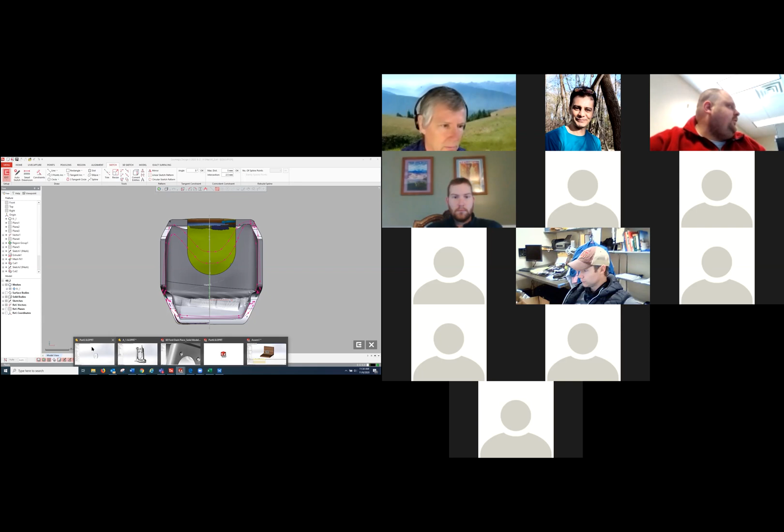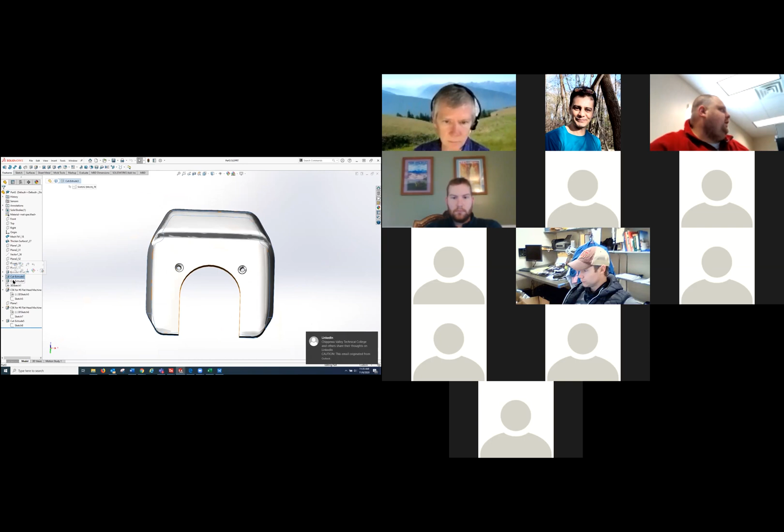So I'll just quickly show you here the next step, right? So once you're done in that software, you can output your part right into SolidWorks. And what the software does is it gives you a smart part. In the past, us as designers always struggled because the output of laser line probes or scanners or photogrammetry was dumb parts, where there was no design tree, there were no features, it was just raw pixels and polylines. But now, with the ability of these softwares and the scanner, you can output a physical solid part with actual cuts, extrudes, and features that can be saved as an STL file and dumped directly into your 3D printing software.

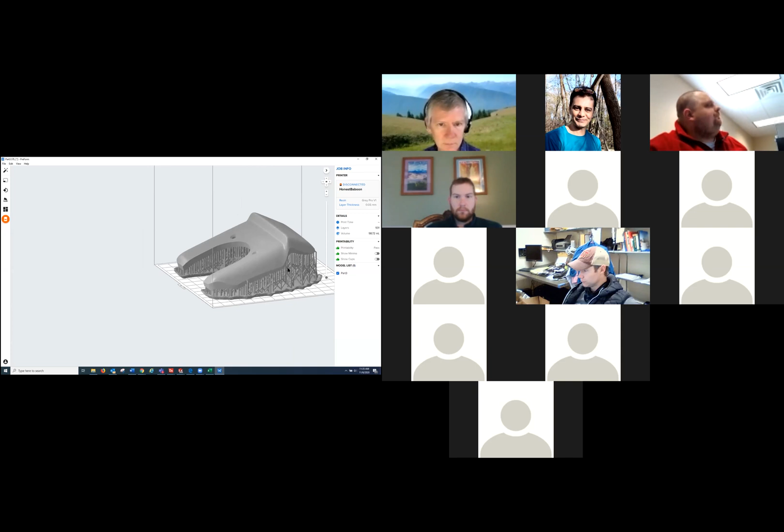Right, so I just wanted to show you how we were able to take this original part and shape, scan it, modify it, turn it into a smart part, which somebody can modify even more in the future, and dump it directly into a 3D printing software. So this, in less than a day, can be into our printer, right? Obviously, it's going to take time through the printer, but in less than a day, you can go from nothing to a point cloud to surfaces, sketches, and extrusions to a final part in SolidWorks or Creo or other softwares, and then directly into your 3D printing software.

So I just wanted to show you that, and then open it up to questions, right? We've been here 3 hours. If there's questions that people want to see, like specifically, how do I fix a point cloud, or how do I create the surface? I just wanted to leave that out there for people to ask.

Is this a service that you perform? A service that we perform. Well, we have industry partners, right? So Ashley is part of this additive manufacturing project, and right now I'm the instructor, I'm partnering with them to create these types of tools and these outputs.

In the future, the goal is to incorporate these into the capstone class, where, say, somebody comes in and says, hey, I want a 3D model of this. We can make that part of our capstone project where students can work with a company and create these things. So it's more of a partnership than service, but yes, we work with the industries that are supporting us, like you on this call, to do small projects like this.

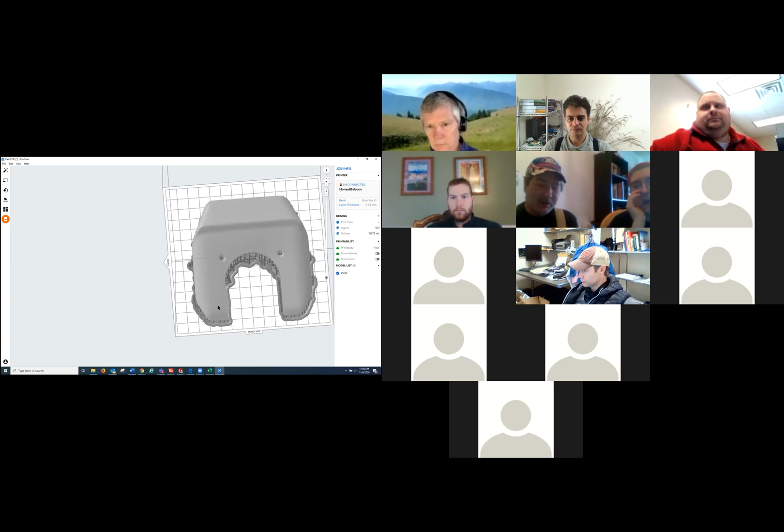Who asked that question? I'm sorry. That was Steve. Yeah, there's a question from Mr. Hoyer here. He asked, how do you repair a point cloud? We've been working with 3D flow, with photogrammetry, and that was one of my biggest problems that I was having, was repairing point cloud.

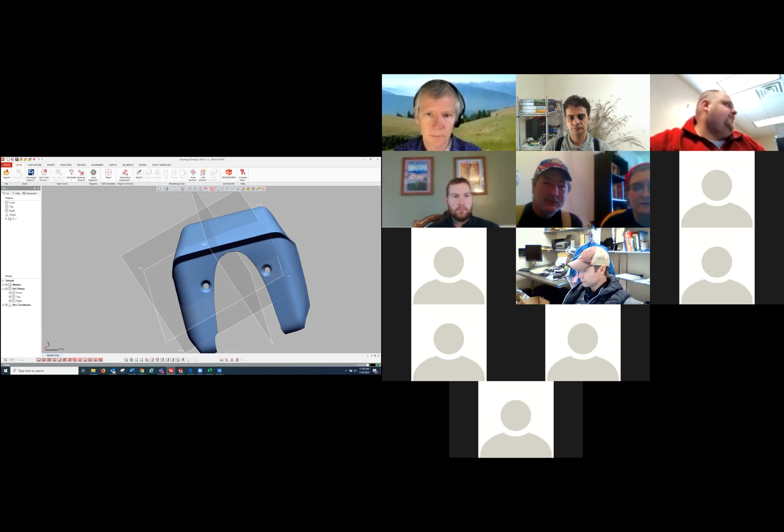Okay, so the short answer is, or the long answer is, how do I best say this? Yes, you can repair point clouds, and yes, there are free softwares out there you can download to do that, but you really need some of these specific softwares to get good point cloud cleanup done. And that's where Geomagic Design X comes in. For instance, right here, if you look, this was a paint chip in the surface of the part, right? Technically that could be a defect, something you want to clean up.

In this software, it's as easy as coming up here and clicking the defeature tool. I come out here and I just lasso that region. Over here in my feature tree, I can tell it I want to fill it. I want to match the curvature of the area. And I click OK. It's as simple as cleaning up your point cloud that way. Oh, that's pretty handy.

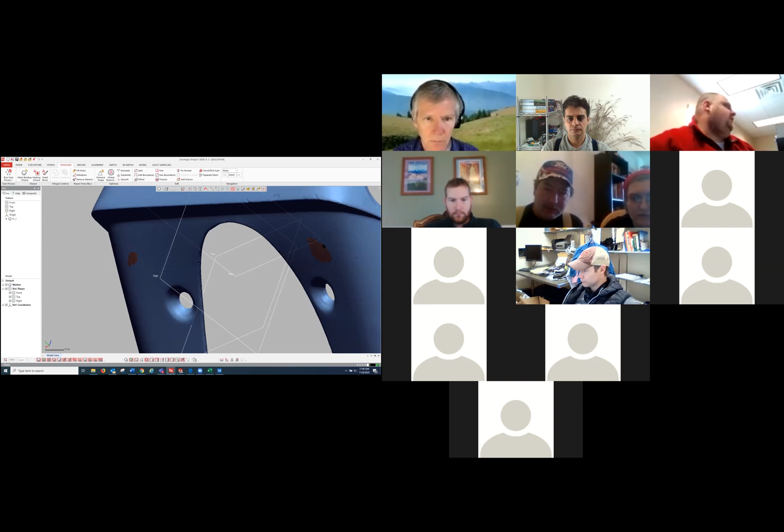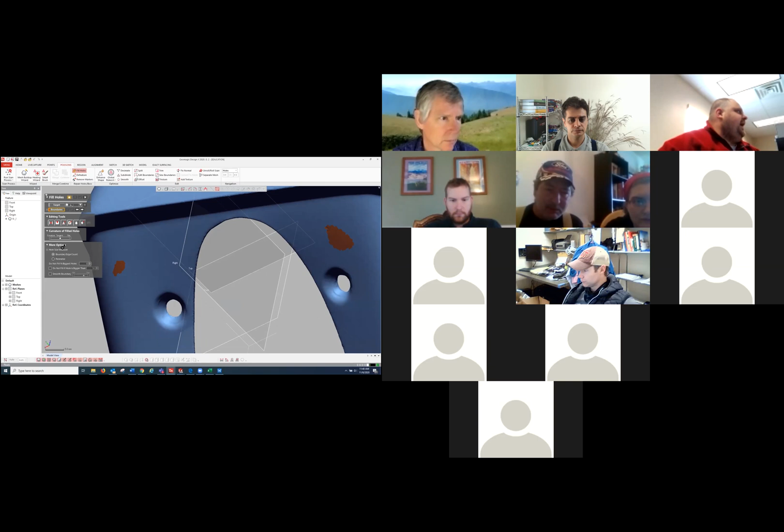Yeah. Now let's say you have a hole in your point cloud, right? Let me just delete some stuff here. So let's say I have all these holes in my point cloud. I zoom in, and I actually have the points turned off right now and just have the STL facets on. But this software also has a fill hole tool. You can change tangency, curvature, flat, and you can select these holes and fill them. So you can see, I deleted that area out, and you're able to fill it in, right?

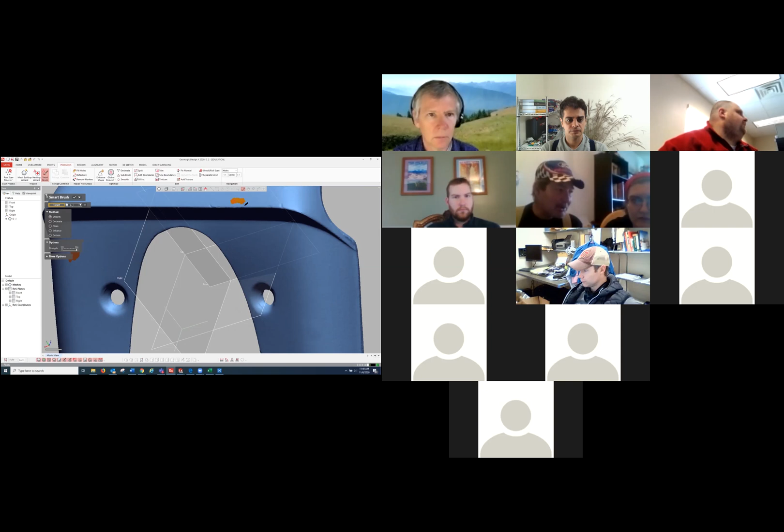You can come in and smooth, right? They make these smoothing, cleaning, and enhancing features. So you can come in with like a paintbrush and just clean up areas. So these softwares are set up really similar to design softwares where you as a designer can take point clouds and clean them up and fill holes and stuff like that.

Oh, that's a great demonstration. Thanks. Yeah, and the only free software out there that we've been able to find is called Meshmixer. And all Meshmixer allows you to do is pretty much fill holes and smooth.

We've been using 3D Flow. Okay. We saw it demonstrated through a college art program, and it was last semester when they were having to photo scan their projects and send them to the instructor, and doing it that way. And I thought, well, that's kind of interesting. And I thought, well, maybe we could learn how to do this, but I found it to be actually pretty difficult. You know, you have to mask all their photos. You got to take 50 photos and then mask them all. And like you say, there's a few hours of work involved, you know?

Yeah. And that's the beauty of like the Zeiss Comet and the rotary table is, you know, it's taking pictures and creating that point cloud, and the software is smart enough, as long as you tell it what features are common, it'll automatically align all those for you.

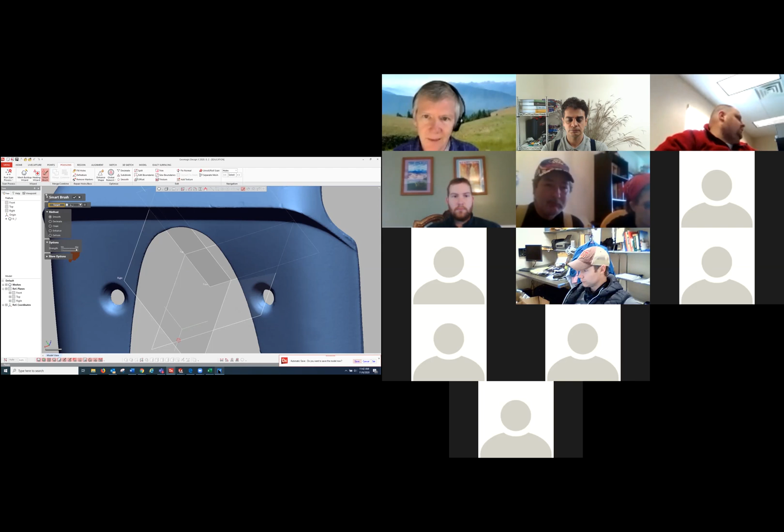Yeah. Blender is a freeware open source software that you can manipulate point clouds with, although it's more for artistic purposes rather than engineering purposes. And it was fairly difficult for me to try to figure out how to use it, but it's free and you can do some smoothing and stuff. So if you don't have the money for the Geomagic, which I think is sort of expensive, Blender is a free one. It can do some things.

Good to know. Yeah. Geomagic is free for a 15-day download. And they have 3 versions of the software, so you can step up and get 45 days of all their software.

How would you rate the learning curve for Geomagic, Joe? If you know SolidWorks, it's very simple to catch on to. So I've never been trained on the software. We purchased the software end of last year, and this is kind of unfair because I did go to training on Polyworks, so I understand the principles of all these steps. I just don't understand the clicks. So by knowing SolidWorks and the background of Polyworks, I was able to pick up this software in about 3 hours. Very good. Nice.

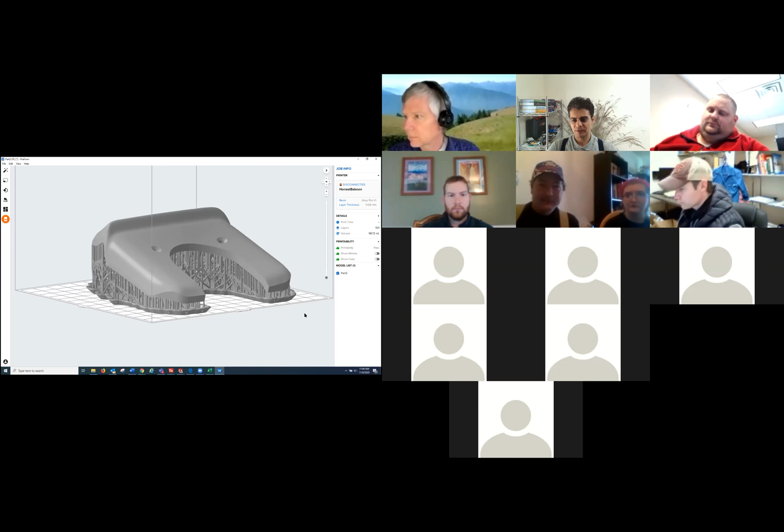Any more questions? Very good. So, one thing I do want to show you guys, though, when we tried doing this work before we bought this software, like we were doing the artistic stuff, we were having a lot of failures in our 3D prints. And one thing I found is, 3D printers use STL files, which is basically triangles all meshed together. And if you don't know what to look for, you can create defects in your parts.

And the first thing that we found, where is that part here? If you're just playing with these free softwares, you've got to cross-section your models to make sure there's no triangles bridging between your top surface and your bottom surface, because your 3D printer will technically not create a gap, but it'll create a defect like porosity or lack of fusion through your part, right? So that's something we've learned here in the last couple days.

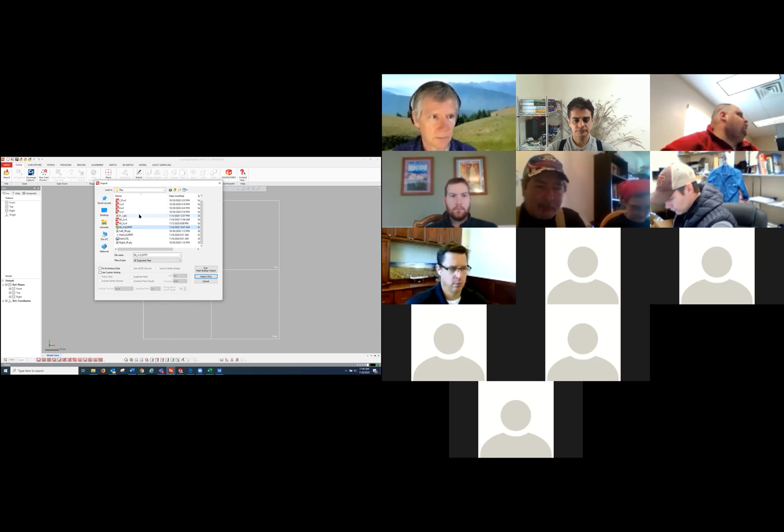That is pretty important. See if I can find the part I'm looking for. Yeah, you can corrupt your parts pretty significantly if you aren't careful, where you have 5 points all at the same point, so there's really no triangle there. All kinds of weird stuff that can happen with those point clouds.

So I can't find it right now. It's on. Something's going wonky with my computer, or my jump drive and computer. The software shut down on me, and you know how it is when you're under the microscope and you can't find anything.

So any other questions out there? Steve, I think I interrupted you when you wanted to ask your question. Did you have a question? No? Okay. Nice. All right. Thank you so much.

Very good. You are collaborating with Ashley Furniture, the world's largest furniture manufacturer. So this is very good. I haven't heard back from them if this is what they wanted, but I've sent them the part. We've got the scan. I don't know if they want it more detailed or not. But this simple surface took me about, I don't know, a couple hours to create.

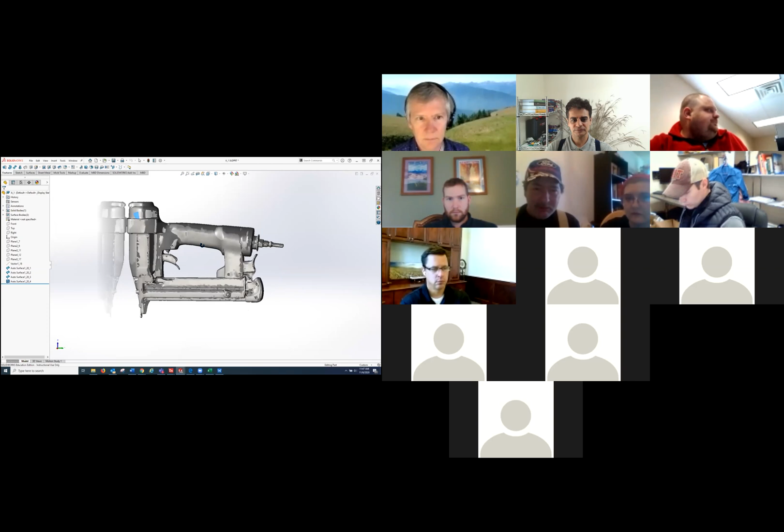Paul, we are very interested in using the Comet 3D scanner for inspection as well. So as you see, we are successful using this device for reverse engineering. So do we have any chance to receive support from you? Maybe a presentation about how you're using this device for inspection purposes? Yeah.

I don't have anything right now, but we've used it. We're currently working on a project to do this mapping of deviations from the heat treatment process and removal from build plate. We had a project where we knew the parts at the end were going to be machined, and so additional material was being printed on the outside as sacrificial, so this would be machined away.

And the group that was doing the machining had trouble finding the machined part within the preform, so they ended up growing that surface by like 200%, which adds a lot of time and cost to the job. So we're working on a project right now with the Comet to try to, one, shrink that part, and two, understand what happens when that post-print heat treatment and removal from the build plate occurs. So yeah, it's definitely something we can share when we have some results from it.